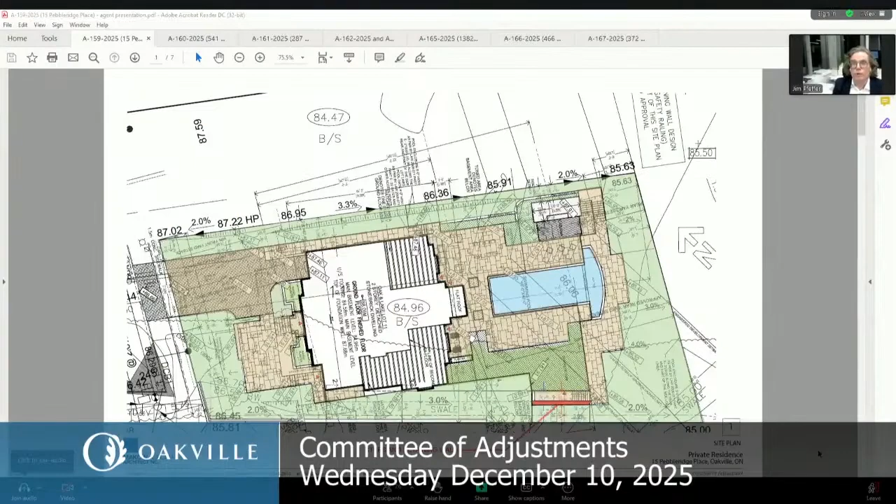I'm here, I'm Jim Pfeffer of 95 St. Clair Avenue West, and I hope we can keep this fairly simple. I did send in a presentation, which I think is just coming up. So this project has been before the committee before, so we got approval for the original house, and we got approval later on for the cabana.

And what's happened now is the construction of that very short retaining wall that you see highlighted in red at the sort of bottom of the plan does not comply with the zoning. And you know, it's an unfortunate sort of mistake that was made on site, and that's now an as-built condition.

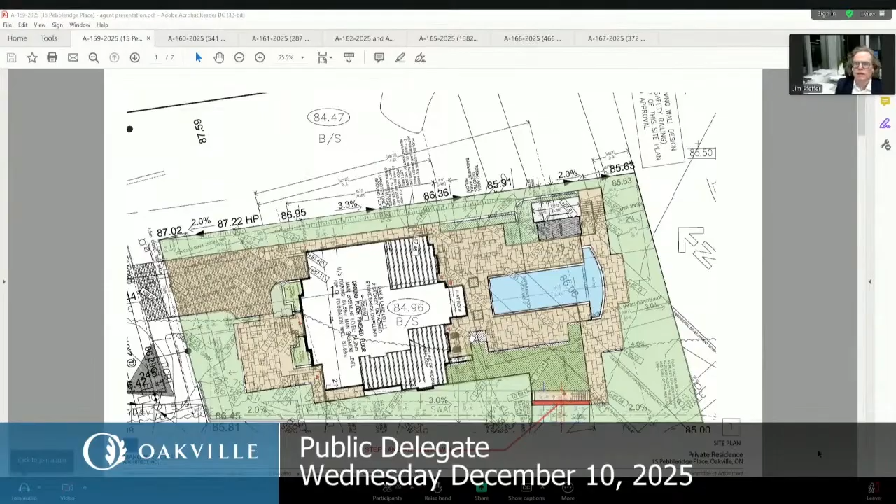If we go on to the next page, I think I can explain how this came to be. You can see a couple of sets of dimensions there. There's a set of dimensions in blue, which is the set of dimensions to the stair, and we would actually comply with the permitted encroachment criteria for stairs.

However, when this went for building permit, they said, well, we're really looking at the stairs and the retaining wall for the stairs together as one piece. So together, the stairs and the retaining wall do not meet the permitted encroachment requirements, notwithstanding the fact that there is still a pretty generous setback to the side property line.

And that stair and the retaining wall, they go to a basement walkout. This site kind of butts Lake Ontario, so it slopes down a lot towards the back. So we made the correction, the drawings were issued to the site, and the building permit was issued.

That retaining wall moved in, but somehow that change never made it to the site, and the retaining wall was built in the position that you see it here. And I think at this point, of course, they could jackhammer out the retaining wall and sort of put it back together with a new pour, but that would actually be a much poorer form of construction.

It would be less resilient, less durable in the long term, and doing that destruction now, it's loud, it's noisy, it generates waste, and it would lead to a much less durable building. So it really wouldn't be desirable to take it out right now, which is why we're asking the committee to just approve this minor encroachment.

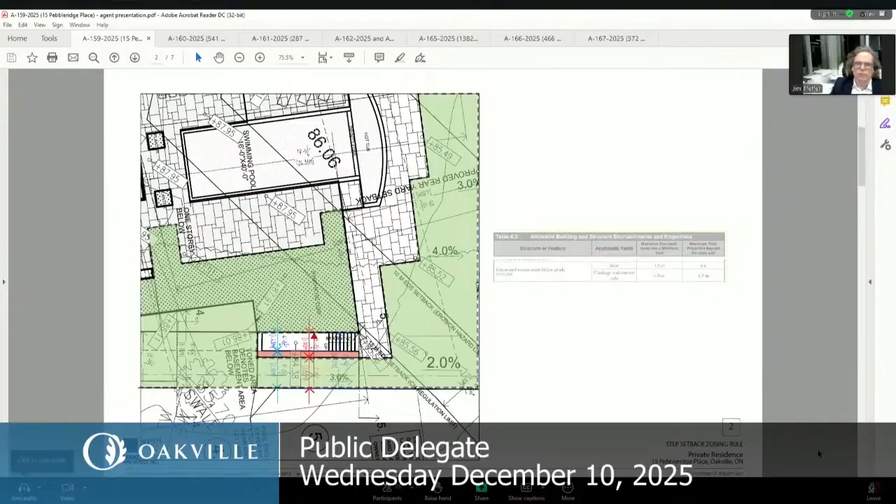Staff, as you will have seen, thinks that this is both minor, appropriate, and desirable. If you go to the next page, you can see a side elevation here, and you can see just how very small that retaining wall pops up above the grade at the side of the house. The well inside is about 4 feet deep.

And there's a similar inroad view from the back. You can just see, if you were looking from the back of the house, how that retaining wall would appear. I point out that since this was a mistake we made from the outset, the drawing of this retaining wall in its current position was reviewed by the site grading engineer, and it was also reviewed by Conservation Halton in this present position.

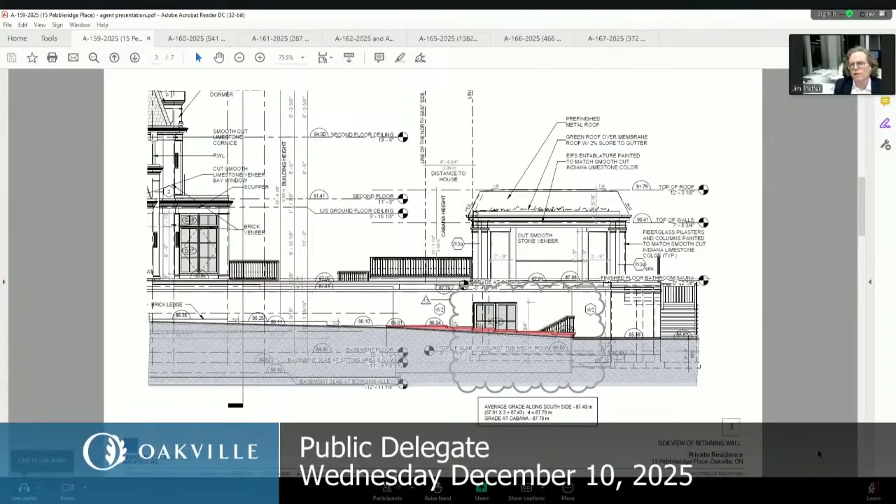Of course, the site just slopes right back to Lake Ontario, and Conservation Halton is okay with it. City staff is okay with it. So I hope you understand what's going on here, and I'm happy to take any questions.

Questions for Mr. Pfeffer? Mr. Dickey? Thank you, Madam Chair.

This stairway is going down to the basement, the underground parking, not below the two-story house, so to speak? Yeah, that's right. The site slopes down towards the lake, and this is at the back of the property, more on the Lake Ontario side. So it is essentially a walkout, but you go down a few steps to get into a recreation area in the basement.

So I'll just make this comment. You've totaled 6 variances on the property, 6 variances, including the ones you came for before. Yeah. On a property that doesn't have an unusual shape or anything else. And to me, if this had come as 6 variances from the beginning, I'd be starting to say, is this type of house appropriate or desirable for the lot?

But you've come at 2 different times. I understand you made a mistake, and don't get me wrong here, I'm just putting forth my position for future reference. When I see 6 variances on a lot, I think there's a problem, and those 6 variances aren't minor, and I begin to wonder if it's appropriate and desirable. Your situation happened a little differently, but be aware that isn't something I like to see. So be it. Just telling you how I feel.

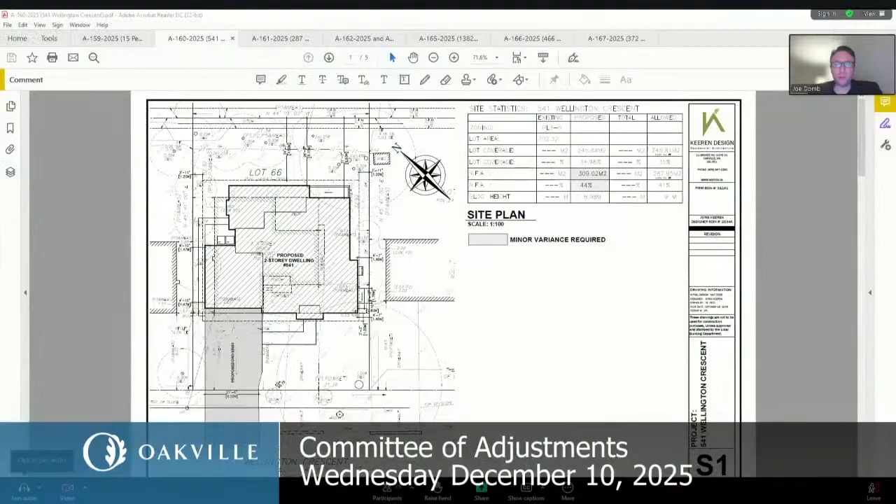Again, that's application 160 at 541 Wellington Crescent. I have Joe Domb here as the agent. Go ahead, Mr. Domb. Yes, Joe Domb, 133 Torresdale Avenue, agent for the owner. The owner would like to construct a new two-story dwelling. We have been through the pre-consultation process with staff, and some changes were made according to their recommendations, and staff have no concerns with the application as per the comments on file.

There's one variance proposed for an RFA of 44%. The dwelling is sensitively designed with massing mitigation features such as articulation on all sides of the dwelling and varying roof heights. There are significant second floor step backs on the west side front facade above the garage, as well as on the northeast rear corner. The rear second floor portion located above the covered porch is also stepped back considerably from both side lot lines, 3.65 meters from the west side lot line and nearly 6 meters from the east side lot line. The proposed RFA increase is relatively modest in this context, and the application complies with the bylaw for lot coverage, setbacks, and height.

For context, a number of similar RFA variances for new dwellings were approved almost directly behind the subject property, just to the northwest at 552 and 556 Weir Avenue, at 43.95% and 43.9%, as well as 528 Weir directly east at 43.87%. Overall, we feel the application is reasonable and minor in nature, and I'd be happy to answer any questions you may have.

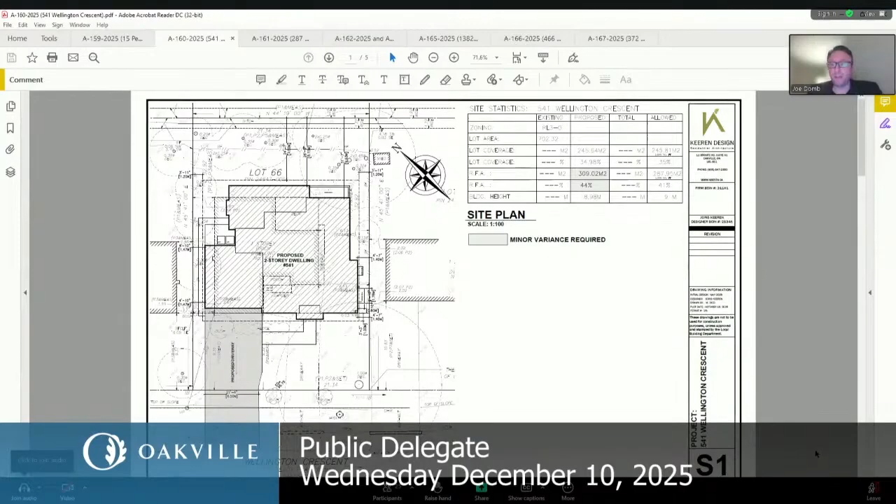Go ahead, Ms. Price. Taking into consideration my site visit, the agent's presentation, as well as the reports from the agent and staff, I believe the variance to be minor in nature and is in keeping with the general intent and purpose of the official plan and zoning bylaw.

Reducing the massing and scale, as well as adding architectural projections and setbacks has helped to ensure that there's no adverse impacts on the abutting properties. I note that there have been no letters or emails in opposition. In conclusion, I believe the four tests of the Planning Act have been met, and I recommend that the proposed application be approved subject to the following conditions: the dwelling be constructed in general accordance with submitted site plan and elevation drawings dated October 16th, 2025, and that the approval expires 2 years from the date of the decision if a building permit has not been issued for the proposed construction.

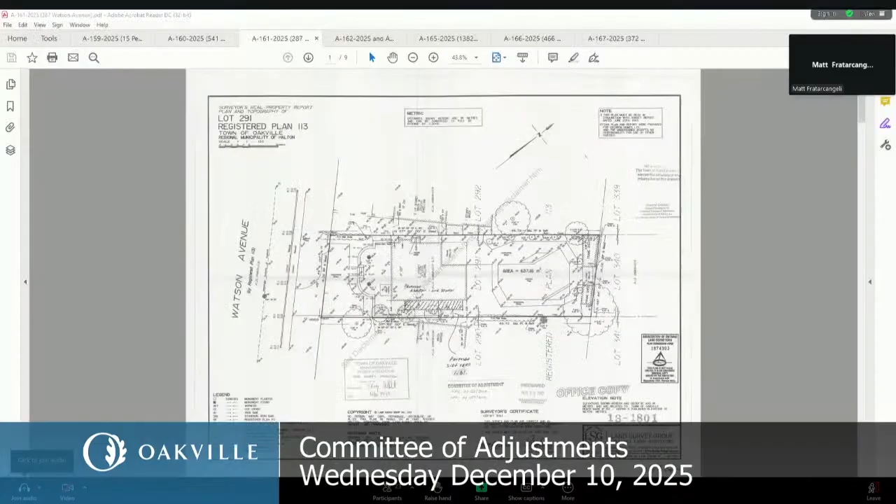Here this evening for a minor variance application to permit a modest rear covered porch with an area of 14.9 square meters. We're requesting one variance, which is a lot coverage increase to 26.2%, where 19% is the maximum. I'd like to note that currently the site is over the allowable lot coverage at 23.9%, so the proposal represents an increase of only 2.3% for the covered porch. I want to thank staff for the review and for recommending no objection and confirming that the variance meets all four tests of the Planning Act. We've also received two letters of support, which have been submitted to staff. I believe the application is fairly straightforward, so I defer to the committee for any questions on this one.

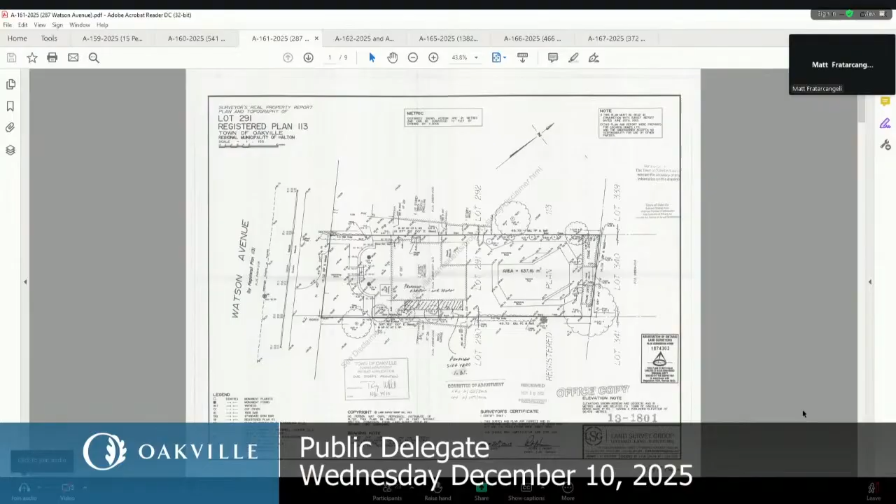I'm not quite sure if my question might be to the town planner, but when I look at the site plan, I see the sheds seem to be right on the lot line. For an existing shed, I thought there had to be a rear yard setback. So I'm just confirming my understanding - I thought they'd also be asking for a variance for the sheds not having a setback. Maybe the town planner can correct me on how that portion of the zoning bylaw applies.

Through you, Madam Chair - the shed is currently in compliance, so the setback will not be required as it's already existing. The applicant is proposing a variance for the porch at the end, not the shed, as the shed is compliant. So to clarify, the shed is legal non-conforming, and we are currently looking at the variance for the covered porch. The shed is not subject to a variance, and they're not replacing the shed.

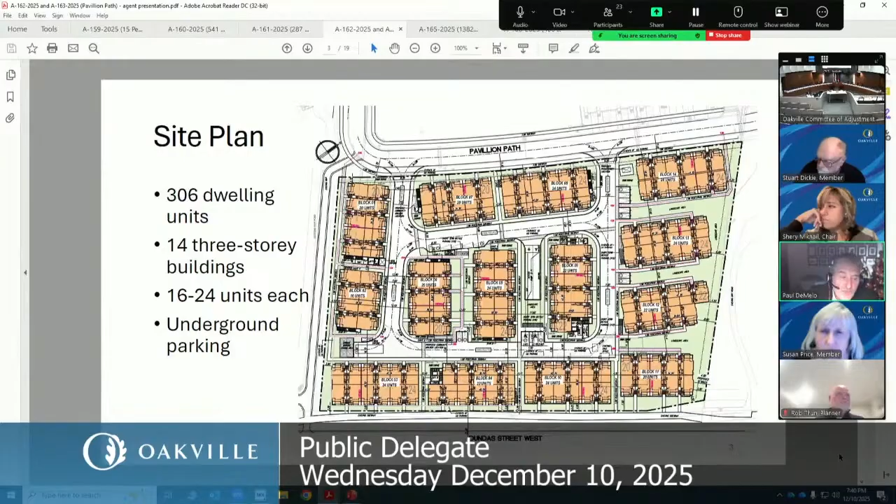The three-story buildings, while they're three-story buildings, you'll see in the next slide they actually are more in line with four-story buildings.

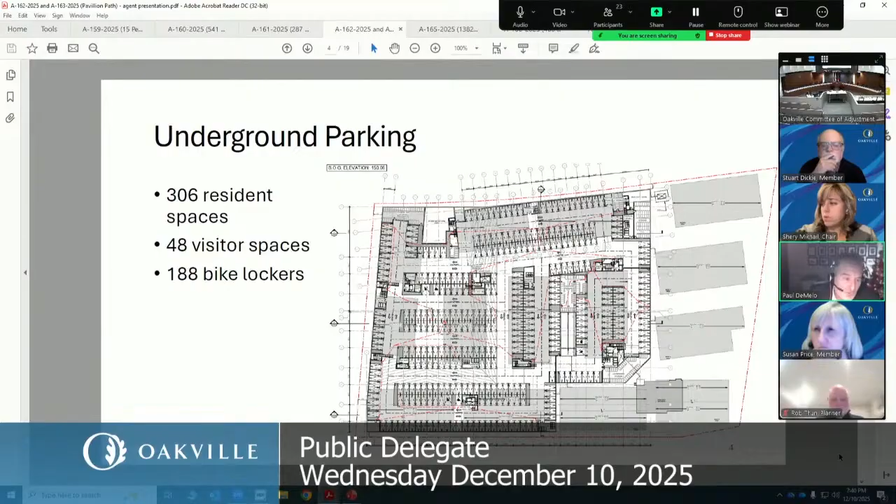This is just the configuration with regards to the underground parking, 306 units, as you'll see, with all the spaces provided. We also have visitor parking spaces provided and bike lockers, all of which will support the transit-supportive development. If I could go to the next slide.

If I could go on further, as I said, the relief is required to extend to Blocks C and B below. If we could go to the next slide.

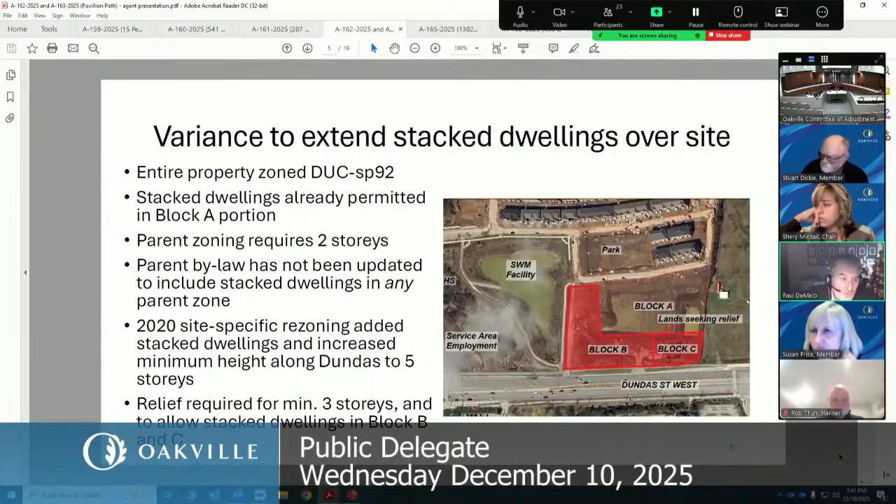With regards to official plan conformity, high residential buildings, which is the intent and direction of the official plan for this core and Dundas area core, high residential building uses shall consist of stacked townhouses, back-to-back townhouses, apartments, and other similar dwellings. There is no specific prohibition or specific requirement to build any one of those within the high density designation. When you're looking at achieving high density, it's the intent and objective of how that gets achieved. This proposal achieves a high density residential form of development, in a form that is very appropriate for the area and actually addresses the need for family-sized units.

There is a prohibition in the official plan that says, as you'll see at sub E, standalone townhomes shall not be permitted adjacent to Dundas Street. We do not believe this provision applies because what is being proposed are not standalone townhomes. It's a very different model, a very different configuration in terms of the development plan.

And if we can go to the next slide, I can give some further indication with regards to that. Again, when you look at the configuration and the policy language, these units have underground parking, and the back-to-back nature of the site does not allow for frontage on a street for the majority of the units. So there is frontage on the public street Dundas for the units that face along Dundas Street, but the rest of them don't — they're internal to the unit, internal to the street network, with the unit inside. Very much like looking at an apartment building, rather than having an interior corridor, this has exterior corridors, and the streets, sidewalks, and paths that connect the different buildings are all connected within one complex.

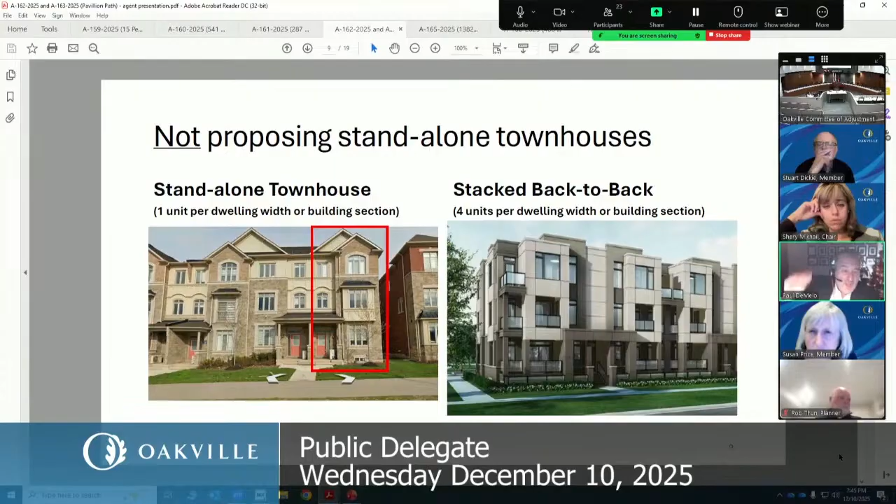In actual fact, what you're seeing is each component is divided into 4 units. There's a unit at the first level that takes the level that goes below grade, partially below grade, and this first full story above grade. Then there's a separate unit for the 2 stories above, and that's replicated on the other side of the complex. If we go to the next slide, you'll see that depicted right there.

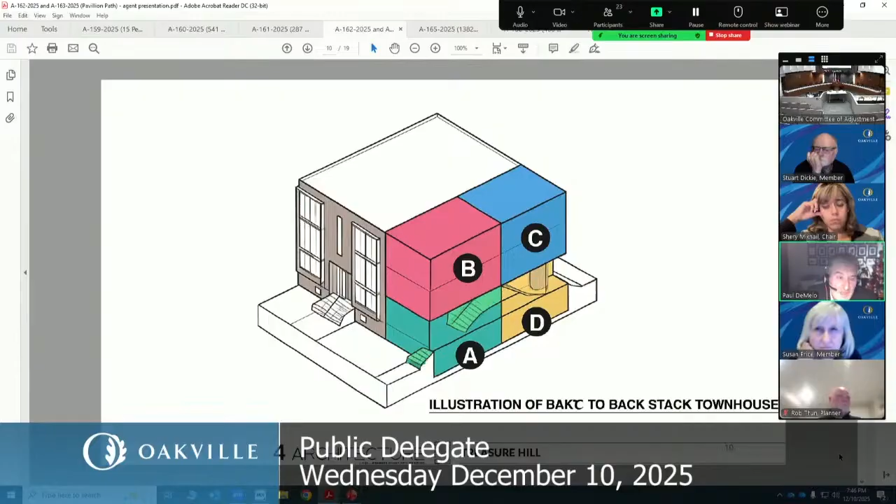So it's more akin to an apartment building form without the wasted space of having a long corridor or hallway, and it provides for the high density form of development that the town wishes to see along this corridor. We can go to the next slide.

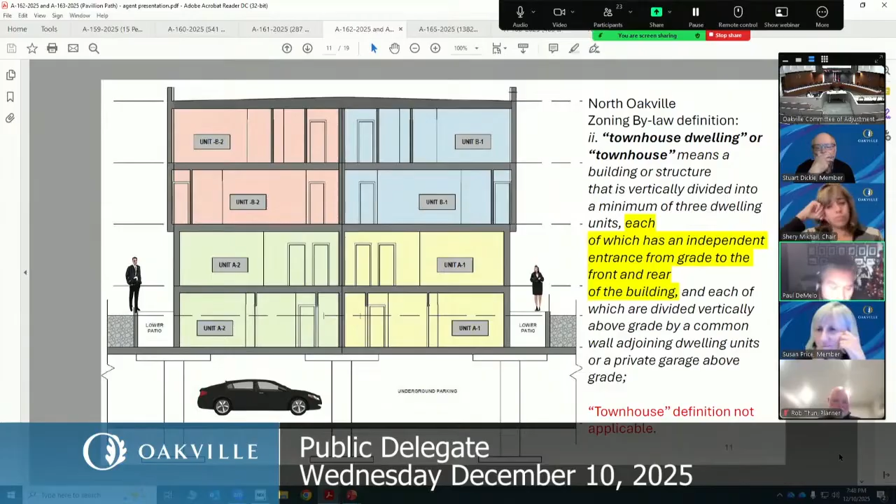If you recall the visual we had of the two types next to each other—one more traditional, standalone with a pass-through on Dundas—that is not what the town envisions, and that is not what we are proposing. What we are proposing in the subject minor variance is a form of development that provides for high density within an appropriate space, but also able to provide independent, family-sized, appropriately accommodated units accessible from the main corridor, from the main streets.

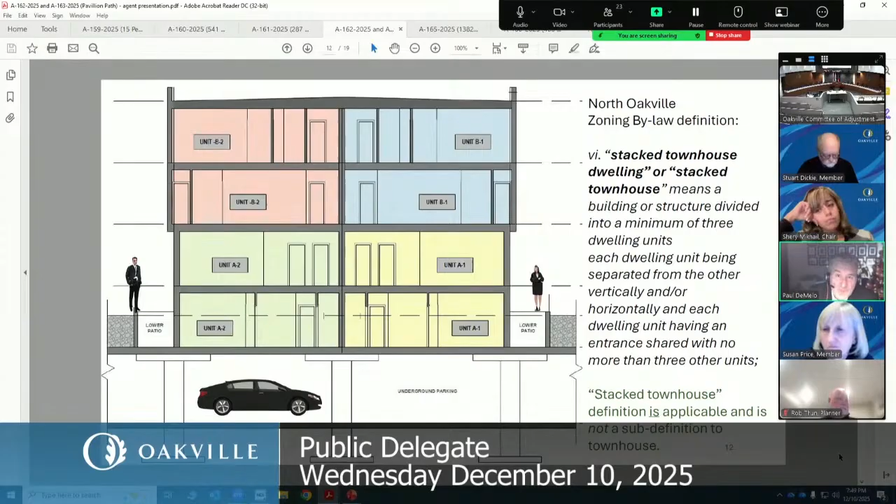Again, this is more of a depiction of the articulation sought across it. We're not looking at one mass, consistent wall—nothing of that nature. We're looking at something with architectural features and details that make each unit, and each building, individual and distinct.

And as I said, it represents 306 units within this configuration of different building blocks, all with parking underneath.

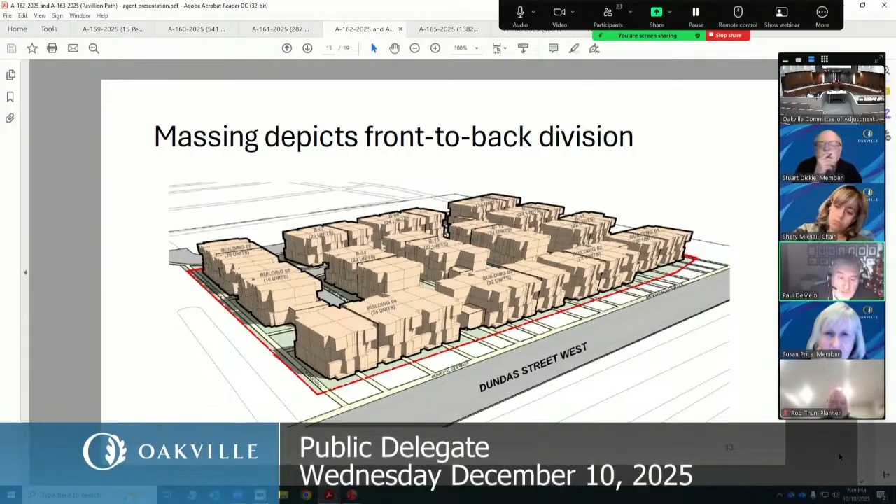Once again, when dealing with official plan conformity, the test for minor variances, as the committee will be aware, is whether the objective meets the general intent and purpose of the official plan. In this case, the general intent and purpose is to provide a high-density residential form of development in this corridor. This is precisely what it does, and it meets all the definitions. There is a restriction, as we've noted, for standalone townhomes because that is not intended and is not defined as being within the high-density core.

It doesn't direct high density, so I can understand the town saying they don't want that identified there—it's not within the high-density form of development. This does fit within the high-density form of development, as it's not a standalone townhouse. Looking at the North Oakville Secondary Plan, it permits a minimum of three storeys, which we have achieved. Further, we actually present what's more akin to a four-storey development.

I'm sorry to rush through—happy to answer any questions the committee may have on this matter—but this goes back to the North Oakville Secondary Plan and OPA 321. Again, the intention of the OP is to protect for higher density development. It's not intended to restrict uses only to apartments and mixed-use building types, but to provide for high-density development and the opportunity for that to be achieved.

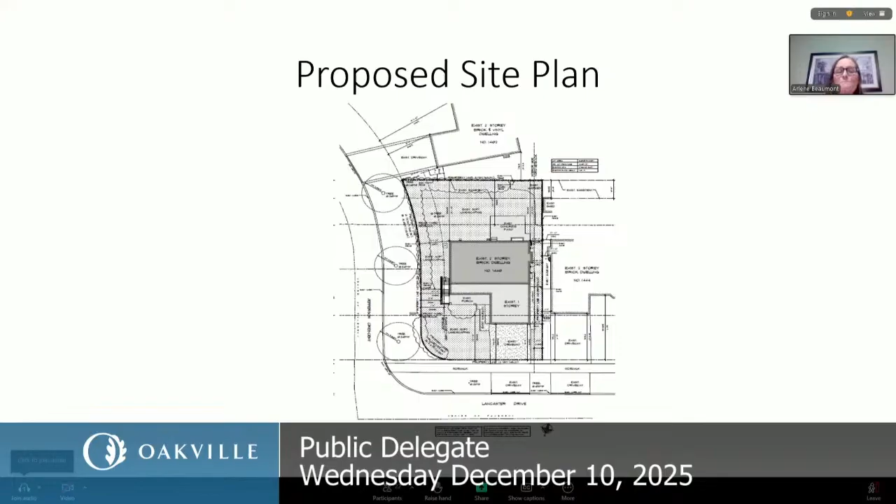Next slide please. This is the site plan. You can see the exterior stairwell on the left-hand side of the drawing. The front of the stairwell will be flush with the front of the porch, so it'll be a nice, neat line there.

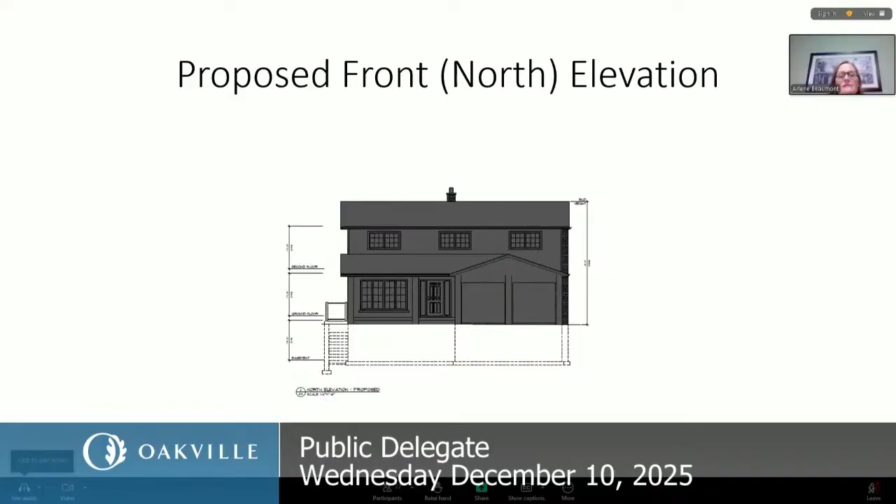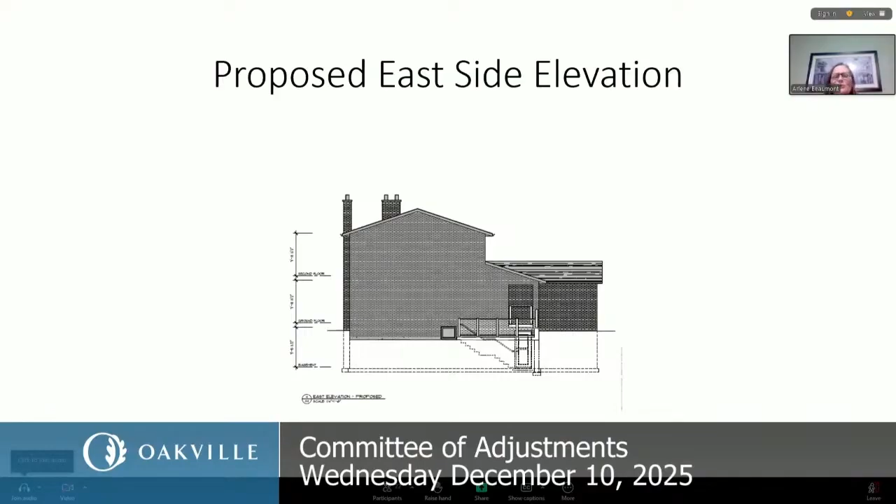Next slide please. This is what the stairwell will look like from the front of the property. And next slide please, this is the view from the exterior side yard. It's a glass railing around, which I think is a good choice because it will be subtle and not a prominent feature. You'll be able to see through that glass railing. Happy to answer any questions.

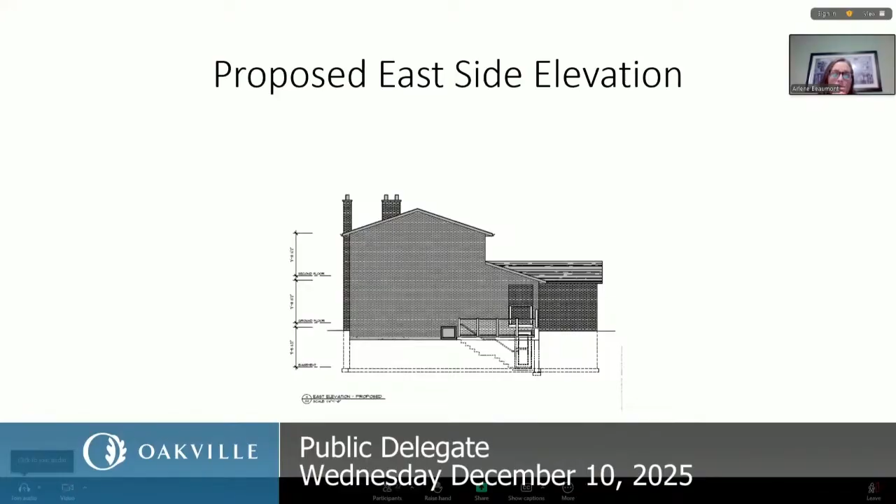Okay, thank you, Ms. Beaumont. Any questions or items of clarification for Ms. Beaumont at this time? Okay, I see none. Has anyone called with interest for this application, Madam Secretary Treasurer? No, Madam Chair, there have been no calls and no one has their hand up. Okay, thank you. Who would like to move a motion?

Go ahead, Mr. Toloski. Thank you, Madam Chair. I'll move this application be approved as applied for, finding that it meets the four tests of the Planning Act. Despite this being a flankage yard encroachment, this will not be highly visible from the street. There's a significant flankage yard remaining, a significant boulevard on top of that. I don't believe there'll be any impact from this addition of the staircase.

I would note that there is no objection from the community, and I would make the approval subject to the staircase proceeding in general accordance with the site plan and elevations dated November 4th, 2025, and that the approval expires within 2 years if the building permit hasn't been issued.

Okay, thank you. Is there discussion on this recommendation? Seeing none, all those in support? Okay, the application has been approved, none opposed.

Thank you very much. Thank you. Have a good night. Thank you.

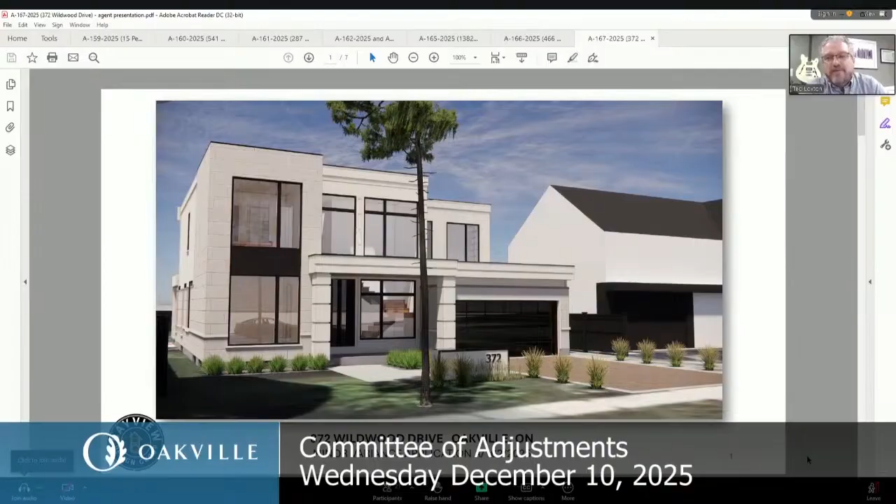So the first slide here is a rendering of the proposed build. Staff speaks about the lack of step backs in the proposed build. The two-story space closest to the adjacent property has a step back design, as you can see above the garage doors in the rendering. The higher side, the full length two-story wall, I positioned adjacent to the properties that front onto Morden Road.

So those adjacent properties have setbacks of 7.96 meters, so 26 feet plus. I'm proposing a 1.7 meter side yard setback from our property, giving us 9.66 meters or 31.5 feet from the closest neighboring house on the west side. If you could go to the next slide, please.

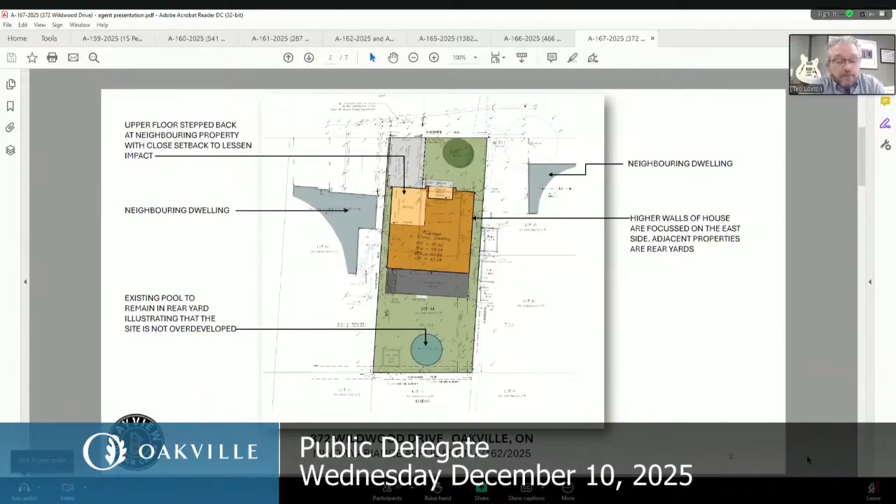Okay, so on my site plan you can see the darker orange color represents the upper floor and the step design I was looking for. I should mention the adjacent properties that front onto Morden Road have a rear yard setback, so they'll always have a setback similar to the 30 feet, even if rebuilt. We did look at placing windows strategically to maintain privacy to both neighbors.

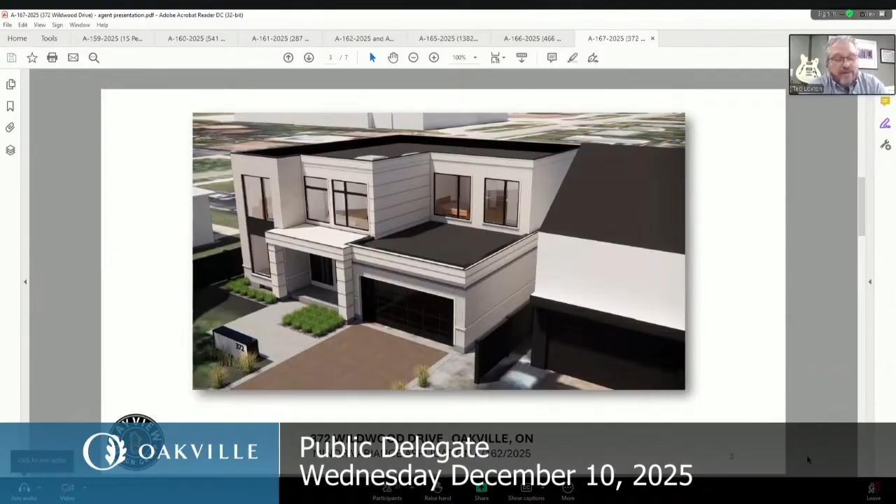And if you go to the next slide, please. So there's essentially the step back design that I was again referring to. If we can go to the next slide.

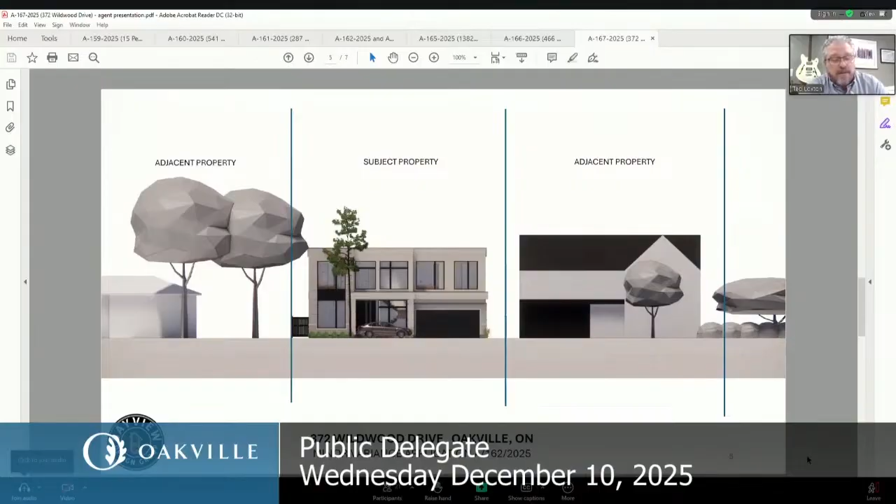I realize I didn't have access to the drawings of 378 Wildwood, so that was as close as I could make it based on a few loose measurements and the survey of our property. Okay, if we can go to the next slide, please.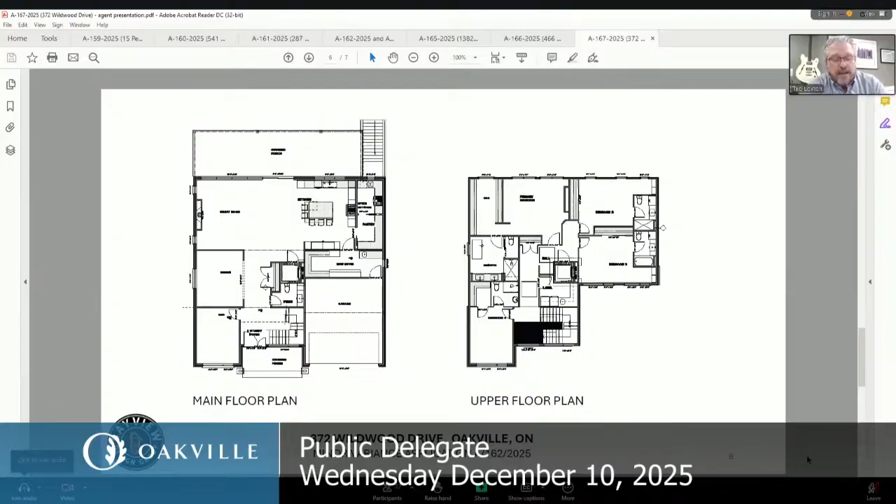So there's the main floor and upper floor of our plans that show the step back design, again going towards the close property being the step back design. And if we can go to the next slide, please.

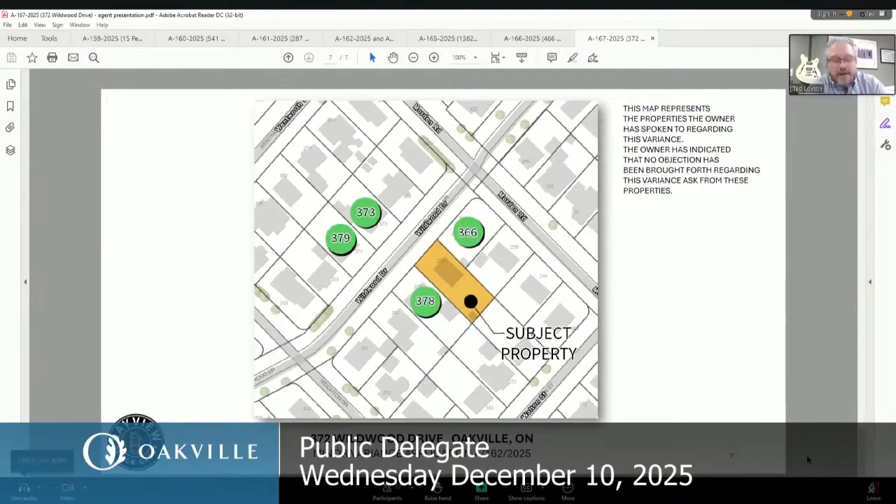Okay, so my client did speak to the neighbors with the green dots there. Each one of the neighbors was very receptive to the proposal. He didn't have any objections from them, and to the best of my knowledge there's been no negative correspondence from the public or neighboring properties. That combined with the notice being posted and no negative correspondence, I respectfully ask that the committee goes against the staff's recommendations and grants the minor variance. I'm more than willing to take any questions.

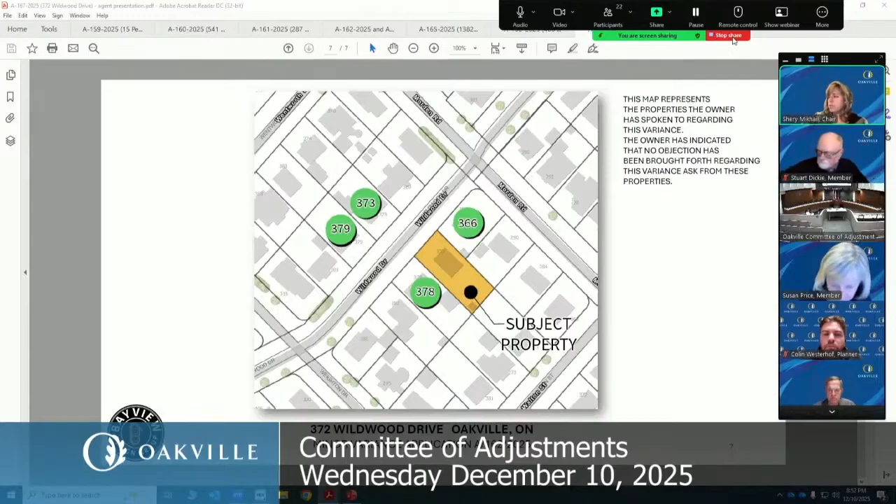Okay, thank you, Mr. Loxton. Have you had an opportunity to converse with town staff regarding your proposal? No, I haven't. So why not? Why didn't you put in for a pre-consultation or take the deferral?

Because our proposal is not that far off from what is expected. I respectfully just thought that we could discuss the points here and come to an agreement on it, hopefully. Okay, and you're aware of the site alteration permit and all the other requirements mentioned in the staff report? Yes. Yep. Okay.

Okay, any questions of Mr. Loxton? None? Okay. Has anyone called with interest for this application, Madam Secretary Treasurer? No, Madam Chair, there have been no calls and no one has their hand up. Okay, thank you. Mr. Dickie?

I just have a question for the town planner. My notes say they were concerned about a two-story element. Maybe it was not on the front wall, but I just wanted to know what that was. I was looking at the front wall and I don't see it. The town planner had made that comment about the two-story architectural feature—which wall was it on, and what is the front wall?

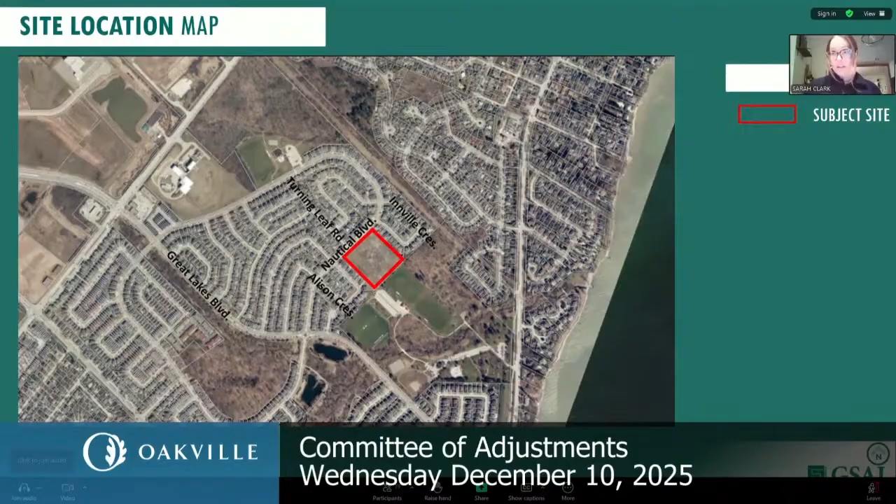Generally speaking, the site is located on the south side of Nautical Boulevard and east of Alison Crescent. What you're seeing is a larger site than that which I'm speaking about today, but this is an aerial context image of the location of the greater subdivision, which is registered, and this is where Lot 5, or 158 Charles Bray Crescent, is situated. Next slide, please.

This is a zoom in on the actual registered subdivision and how the lots were created, and the location of the block specific to this minor variance application, outlined in yellow. This is just provided for context tonight. Next slide, please.

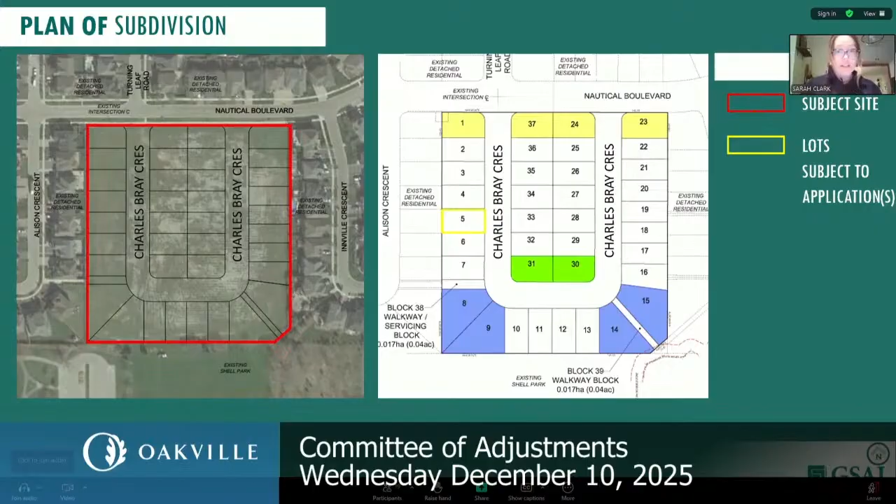So the site is zoned RL6-296. The special exception zone is really just related to permission for a school use on the site. So for all intents and purposes, the site can be considered subject to the parent RL6 zone, with no additional specified performance or regulation standards beyond those in the RL6 parent. Next slide, please.

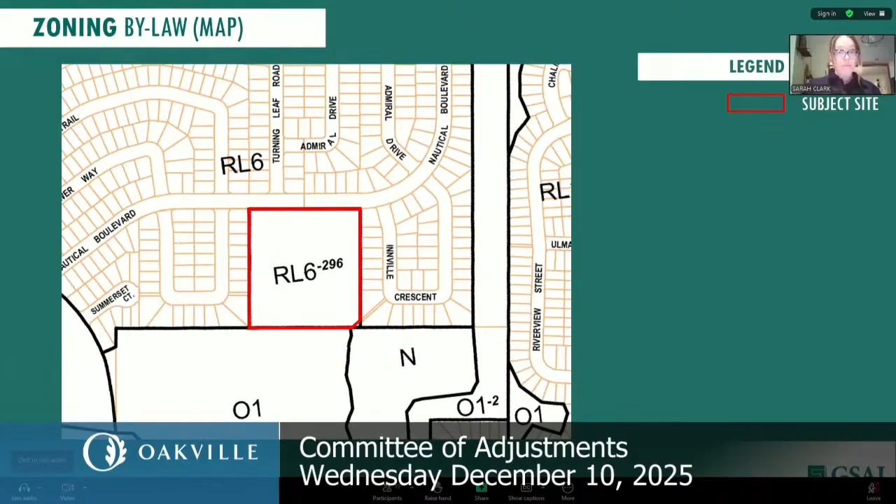As I mentioned at the outset, the purpose of the minor variance is to obtain permission for additional residential gross floor area, specifically the floor area ratio, as there is an exceedance due to the size of the house against the lot size. Specifically, the variance request is to permit a maximum residential floor area ratio of 80%, whereas 75% is permitted. Next slide, please.

As shown on this slide, the additional gross floor area seamlessly blends in with the rest of the house and creates a very continuous and fluid footprint, creating a more typical building footprint, which truly aligns with the balance of similar models in the greater subdivision, all of which, including this one, have received a detailed urban design review through the subdivision application process, as well as an architectural control process.

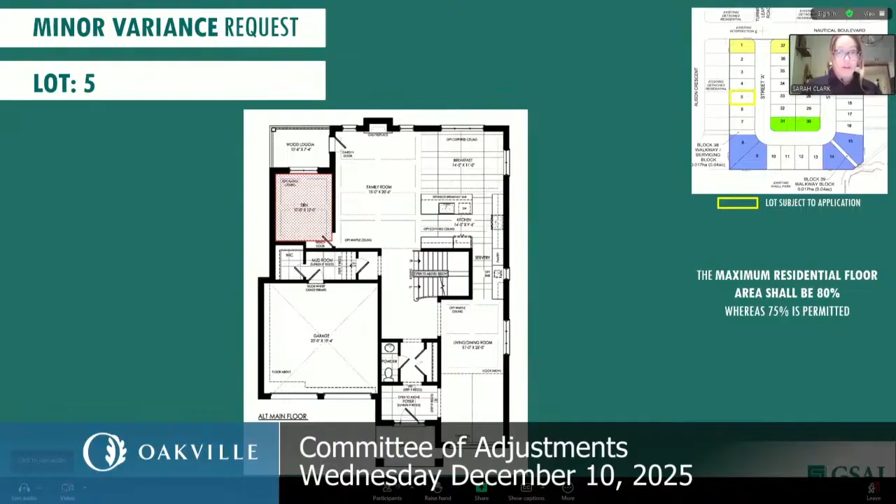There were also conceptual renderings that were part of the review of the former subdivision application, which again was a very fulsome urban design review, which was also approved. So the variance request is to permit a maximum residential floor area of 80%, whereas 75% is permitted.

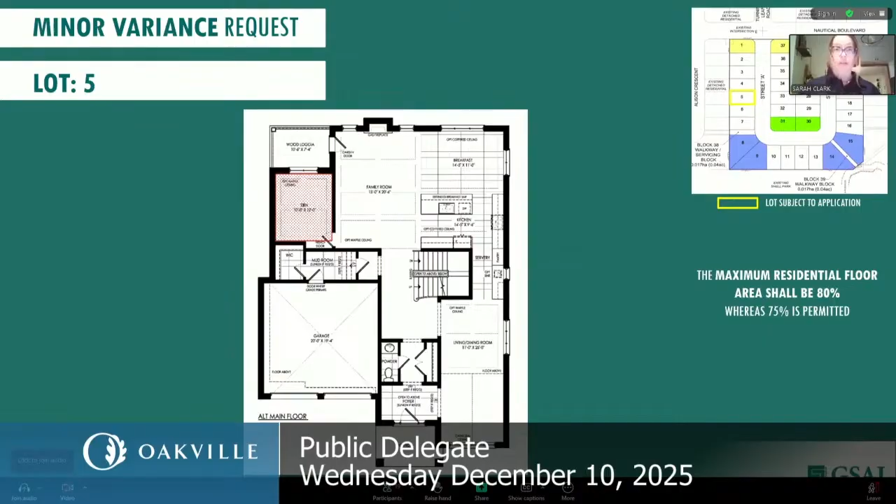I will say that the dwelling actually does meet all of the other zoning performance standards and regulations related to setbacks, building heights, and whatnot. So aside from that floor area ratio exceedance, the dwelling is in full compliance with the regulations of the bylaw. Next slide, please.

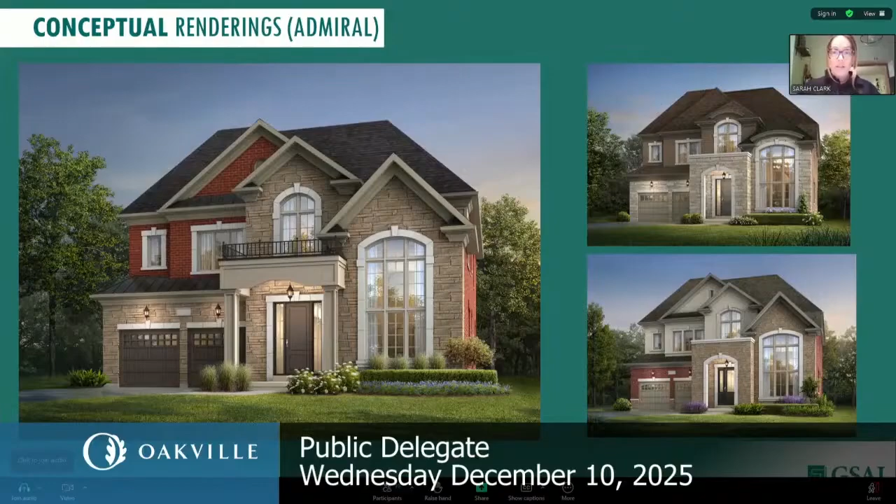Here we just have some concept renderings to show you what we presented through the urban design panel review, or the urban design review through the subdivision process. Next slide, please. That concludes my presentation this evening, and I'm happy to take any questions.

Any questions for Ms. Clark at this time? Go ahead, Mr. Dickie. I see from the, oh, this is to the agent, obviously.

I see from the zoning map that the subject subdivision has a site-specific provision, whereas the surrounding properties, particularly behind you, don't have that. And it's my recollection that the site-specific provision dealt with the fact it was a school site or something like that. So my real question is, the houses behind you, the zoning for the houses behind you also have the 75% residential floor area. Is that correct?

Through you, Madam Chair, to Member Dickie. So they do, you're absolutely correct in pointing out what the site specific is about. And the RL6 floor area ratio is largely governed by either a meter squared or a floor area ratio percentage, and it's the lesser of, if that makes sense.

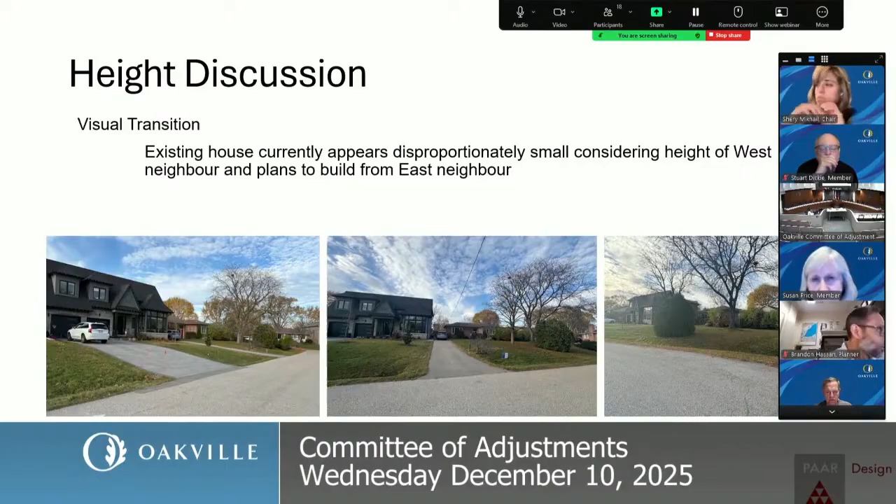The dwelling on the left side is already constructed, and they had the same variance approved at 9.59. As you can see, the building is quite imposing, and we simply want to match the height that was approved previously by the neighbor. Next slide, please.

This is just a streetscape. As you can see, on the left side is the neighbor that was already constructed. On the right side, this house was not constructed yet. This was a COA application in 2024. It was not approved, but it's just a context of what might be approved in the neighborhood and where my client's house would sit in relation.

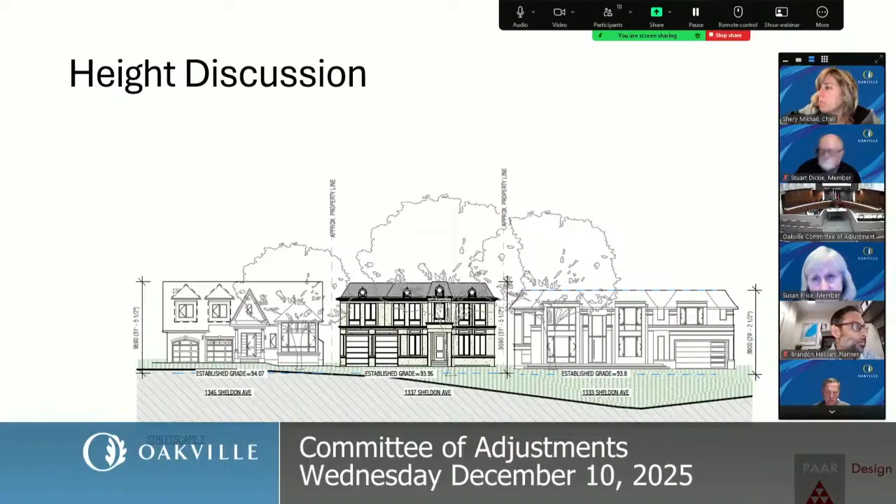Next slide, please. For the west neighbor, as I mentioned, we're matching the height at 9.59. He sits on a grade a little higher than ours, so it looks a little higher. He was actually approved for an RFA variance. We are not requesting a variance. You can read the rest, I don't need to read it to you, but I just wanted to say that we want to maintain and stay consistent with our west side neighbor.

Next slide, please. As I mentioned, on the east side neighbor, they went to COA in 2024. It was, I believe, deferred or not approved, I'm not entirely sure, but the lot is a lot bigger than my client's, and it allows for a larger home to be built. So when you look at being sandwiched by these two dwellings, it makes sense for ours to have an appropriate character as well in the neighborhood. Next slide, please.

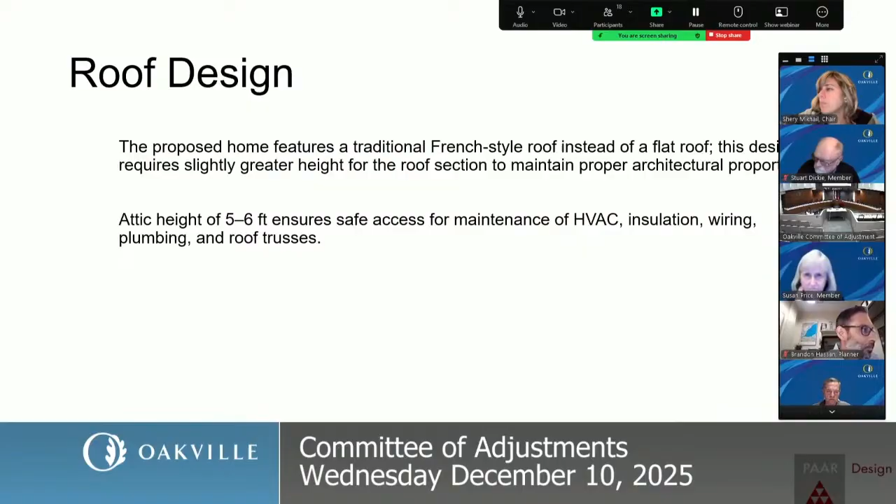Just to speak a little bit about the roof, it's a nice French style roof design instead of a flat roof. So it has the slope, and the height is about 5-6 feet to ensure maintenance, HVAC, insulation, wiring, plumbing, and everything that goes into that. Next slide, please.

I just wanted to mention that this is for a young family. This is their personal residence, not for investment purposes. They've taken great care to communicate with city staff, eliminated a variance. They worked closely with city staff and sent a personal letter to them, communicated very efficiently and very sincerely. Next slide, please.

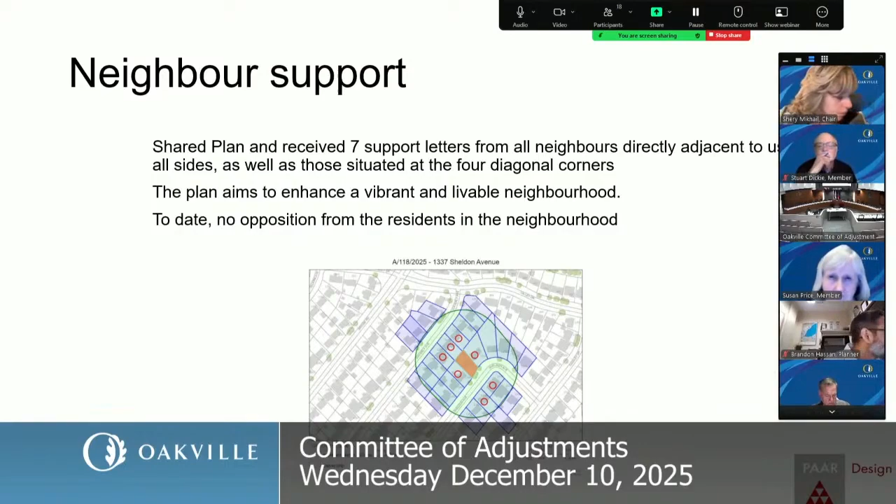To date, we've received 7 support letters. The map at the bottom of my slide shows the location in the orange circle. All neighbors have shown their support and have no concerns about this application. To date, no opposition from residents has been noted. Next slide, please.

When we consider the four tests of the Planning Act as outlined in the staff report, the variance is minor. It's the only variance. The neighbors support it. It's appropriate for the development. It's actually under the lot coverage, which is allowed at 35%. It's a single variance. All other provisions were followed, and we have support of the neighbors and planning staff, and it meets the general intent for a single family dwelling under the official plan. Next slide, please.

This is the end of my presentation. I just included a couple of drawings in case there were any questions, because my drawings were not available. At this time, I welcome any questions or input from the Committee of Adjustment, and thank you for your time.